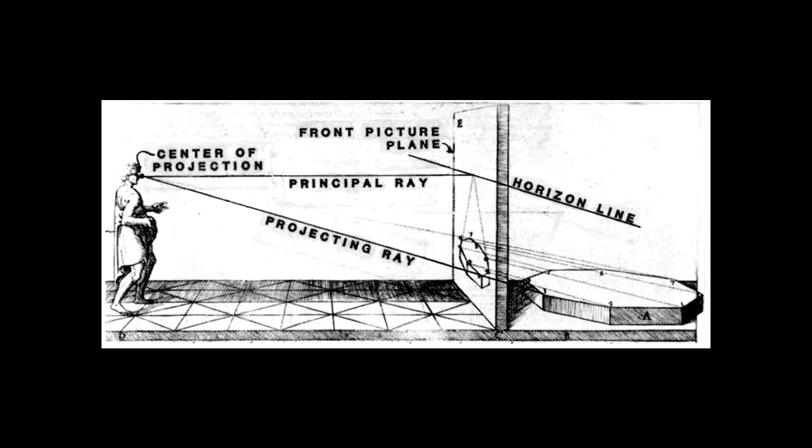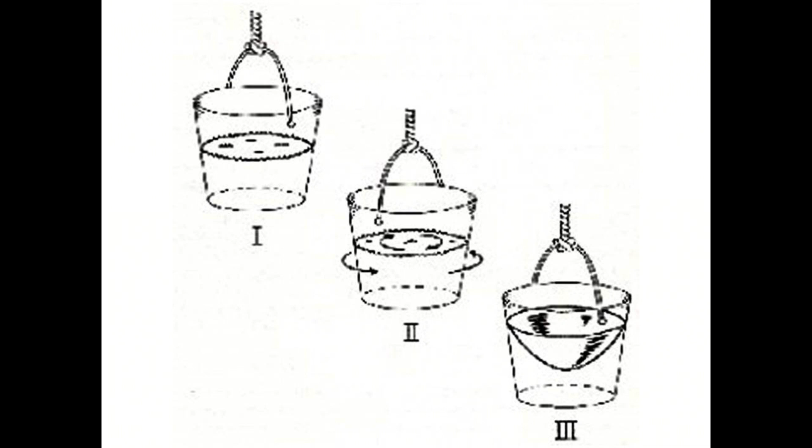But is this a representation of moving space? Where, as a result of rotation, the molecules of water are displaced and held in a different spatial configuration as a result of movement. The diagram does exemplify a mathematical space that responds to thickness, dimension, form, and is reactive. So time has obviously entered into the equation here.

Time can be written or represented in different forms — a clock, a calendar, tidal charts. There are many different ways to show a tidal chart, a flow diagram. But considering space as well as time complicates things.

Another space-time drawing — this image was used by Siegfried Giedion in Mechanization Takes Command, you may recognize it — records the point of the rapier, the fencer, illustrating a spatial, temporal, and intensity relationship. The line weight here — because we architects think about line weight, I think about line weight — indicates both intensity and depth. When it's moving forward, you get this stronger thickness of line. So you have the z-axis here now.

Another space-time drawing traces the more extensive movements here, of kind of torturing this pigeon, this bird in flight. Marey harnessed a pigeon to record its trajectory and its path.

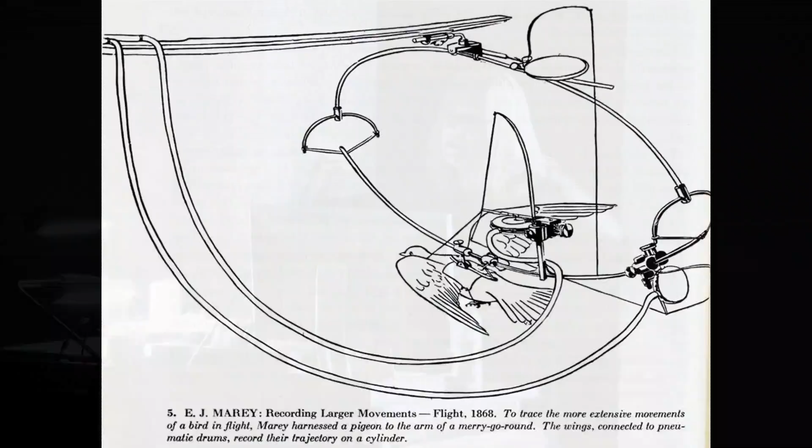Ideas or thought experiments, such as this concept of moving space, can take many forms or be played out in a variety of mediums — drawing, as we've seen examples of here, film, performance, or architecture. I always like to think that ideas don't just sit on a shelf; you take them, you do something with them, and they could be grabbed by a variety of mediums. My medium is architecture, so here we go.

This plan, similar to the pigeon or the rapier, is a drawing that attempts to describe the transformation of this wall as a response to urban life, both sleeping, eating, watching media in a small, very small New York City apartment where life moves through space and time.

So this was a very early project we did. It's actually hand-drawn, that's why it's so funky-looking drawing here. But this bar, this diagonal, was meant to hold everything that you would need.

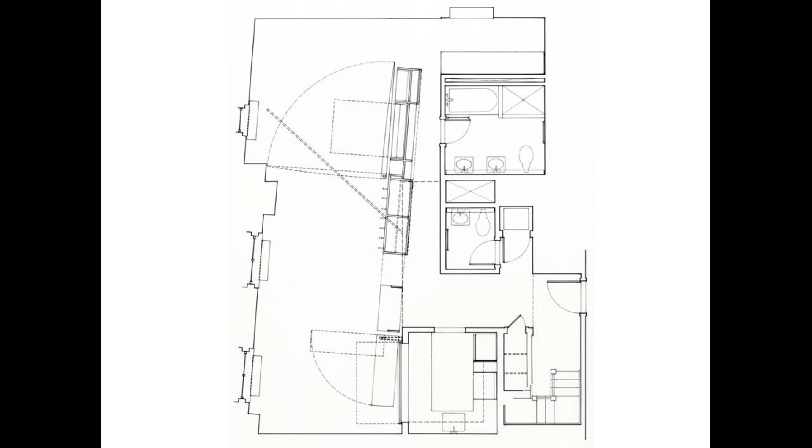You just need to come in with your suitcase, and there were kind of pegs for hanging things. This television, which is not even a flat screen at that time, would move through the space. The table would rotate, the bed would flap down, there were partitions that would move. But it was trying to do as much as it possibly could to be a kind of transformational object, accommodating life for one person in this very, very tiny, small New York City apartment.

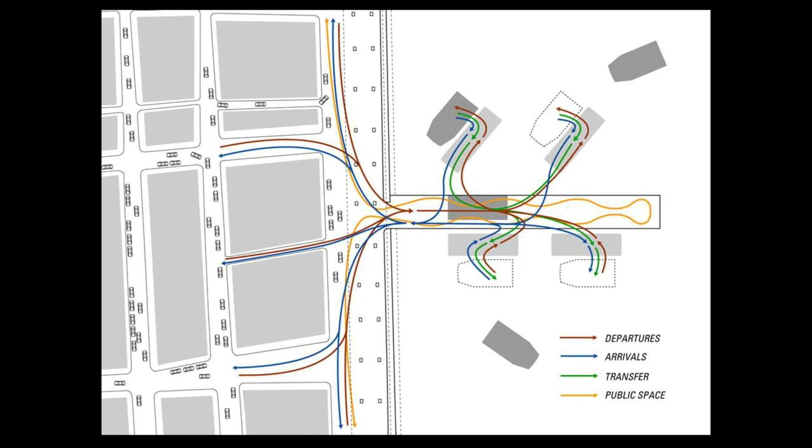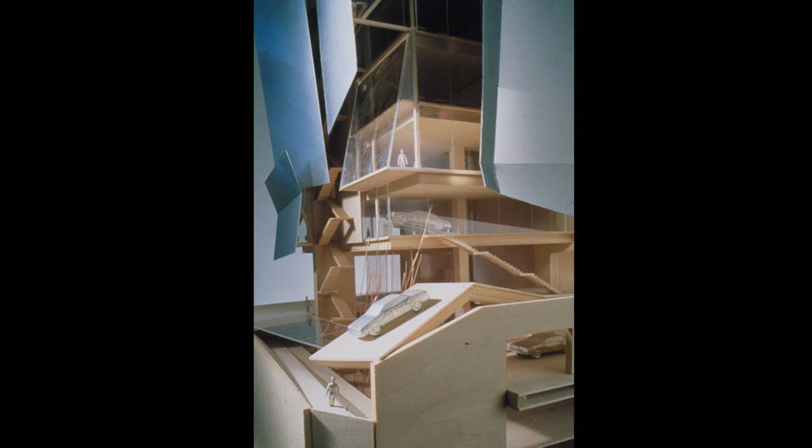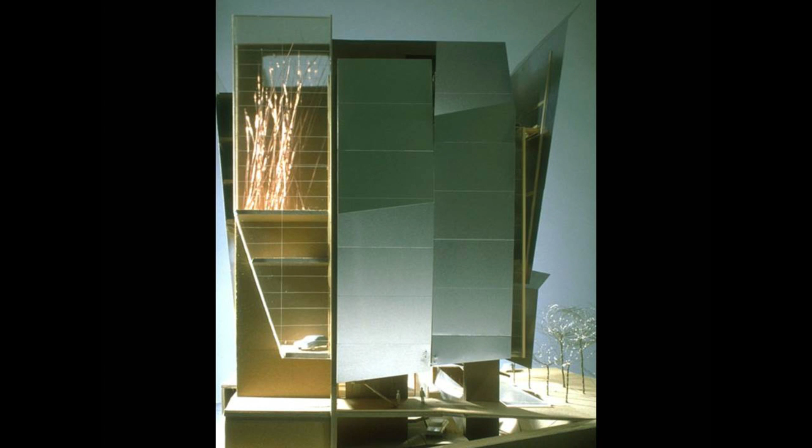Then restaurants, and a gym on top, but this is a vertical garden in the southwest corner. The reason it's closed, why you don't see windows, is that we were making spaces between this skin, which we perforated in places to create a sense of privacy, because there are incredibly tall glass buildings around this one.

And in Korea—somebody can correct me if I'm wrong—but I'm pretty sure a lot of business takes place in restaurants, with a lot of transactions, so there's a kind of privacy needed for long meetings and things. That's what this was all about, these three different restaurants going on in here.

These are a series of study models looking at how this skin attaches itself, and the whole project is actually hung from a core. There's one core, so there are really no columns—it's column-free—hung from the elevator core, service elevator, passenger elevator, with the slabs cantilevering out from that, so we could get that free space around, and then having the skin.

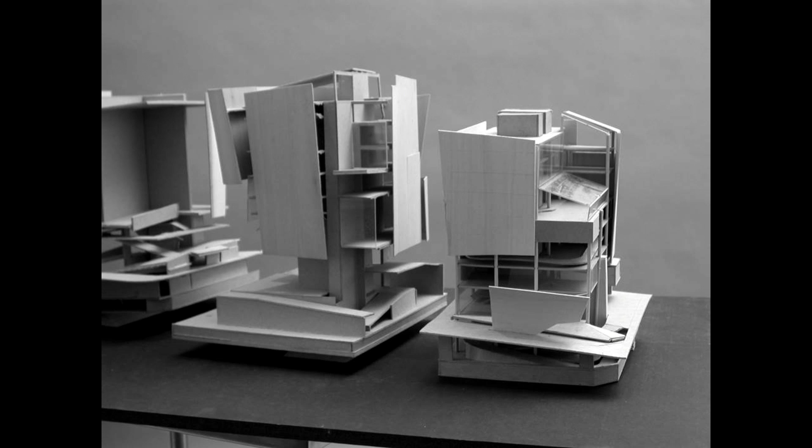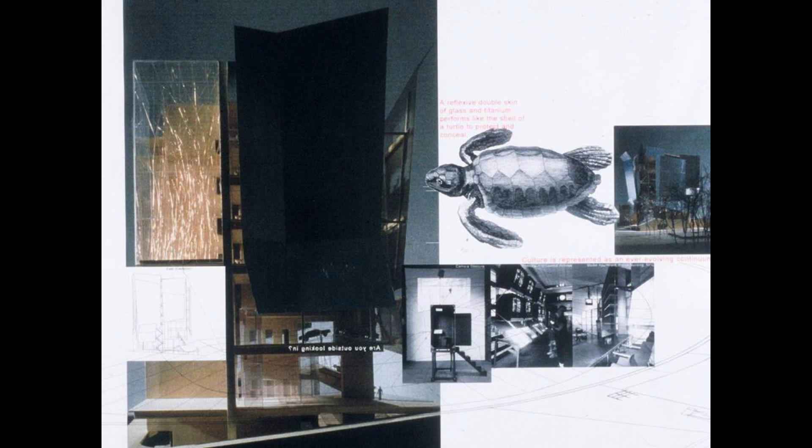Just a collage view of it. This is where you get this sense of scale—there's this company called Pasco, a glass fabrication consortium next door, and you can see it's kind of a peanut shape in this neighborhood. We called the building the Turtle Ship, because these skins are really more like a turtle shell that hides something on the inside.

So if you think back to that first drawing of the rapier and this kind of movement—this drawing is a bird's eye view looking down, and the line weight isn't good here, I'd say, to critique our own drawing that's been transferred to a slide. But there should be a difference between the thicknesses of material, right? I think there should be.

But I like to think of the building this way, that it's kind of making itself, or unwinding itself and winding itself back. That was the way we were thinking of it, as space moving in and moving out, occurring both in section and in plan.

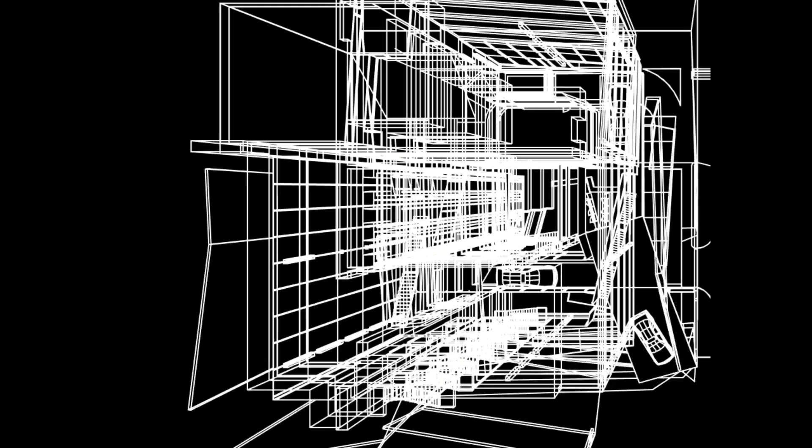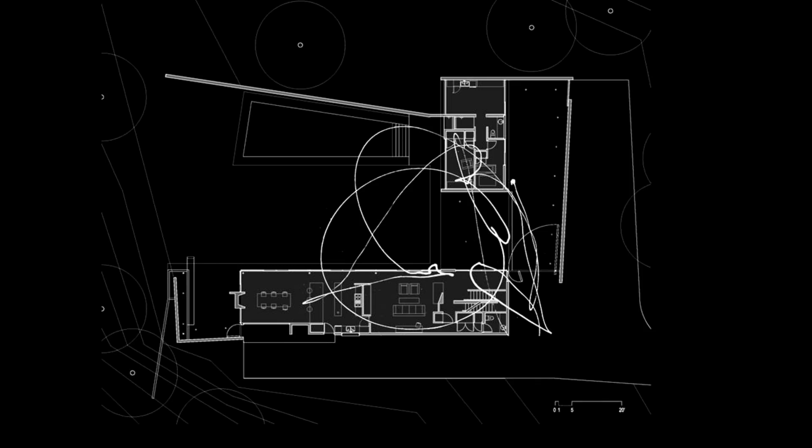So now a residential project—this is that drawing I'm trying to make the point with, by superimposing this, that the majority of the space here is void. You know, this is a house, but they're just kind of edge pieces, and the majority of it is nothing, open. It was a kind of funny commission, a development out in East Hampton, and there was actually no client—we just kind of thought of ourselves, ha ha.

We didn't get to live there though, unfortunately. But so we wanted to, and there's no view at this house. There's really no view. It's almost like an urban, like that Schiller building, kind of looking in on itself. So they're on 1 acre sites, but it looks in. But it's a very lovely climate, and people go out there from the weekends, obviously from the city.

So that entry piece, that entry space, which is here, we thought of as trying to be bigger than it needs to be, right? This kind of huge space that's incredibly generous, that sets up then that outdoor space, which is also indoor. But you actually slip in over here to go through the front door. So that's that opening. You kind of slip in here and go upstairs, living, bar.

This is kind of bedrooms, guest, living. And then the exterior has that sense of those shells, like the Schiller building. We were working on these two projects at the same time, so I wanted to show these together. But it's about slipping into spaces and using materials to create this ambiguity between inside and outside.

So here you really are outside, that's a gate, and then you go inside. This is a kind of outdoor cooking area and kitchen and fireplace, but further back from that condition. And the bathroom, so indoor shower, outdoor shower, shower looking at mirror, looking outside, looking back at what's behind you.

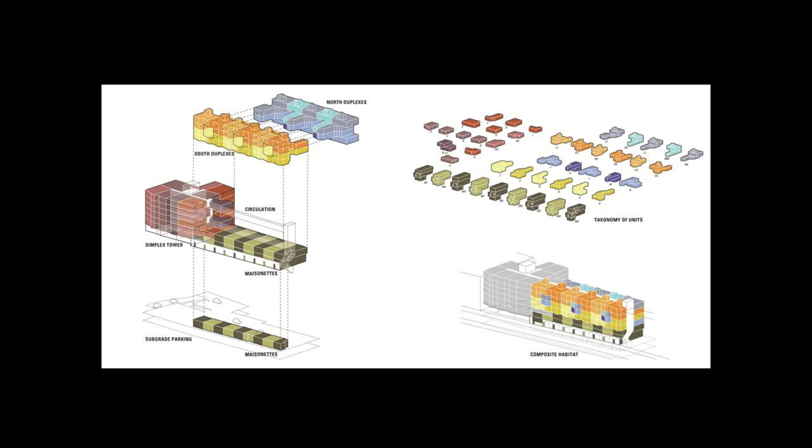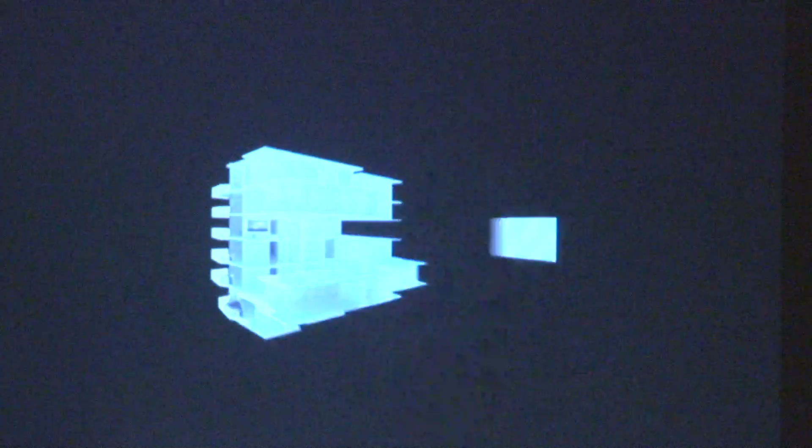This is an animation that was made by D-Box of our project. So the developer made this to show what these different unit types look like. So you have maisonettes on the bottom, you have duplexes. I think this is very funny. So, but it just kind of shows the 4 different types of them, actually. There's kind of small little 1-bedrooms, and that's one that's right on the street. That's a 1-bedroom. But what I really want to talk about here is, so this is the street, right?

And these are showing the different units. And the corridor, there are just 2 corridors here. And so that it goes over, that we're kind of doing that Corb trick of unité of going over and stealing space from the other side. And the maisonettes, there are 9 maisonettes where you can actually drive in. In New York, nobody ever has a car, but in this place there is a garage where you can drive in and come into your space and walk up, and there's a little courtyard in front.

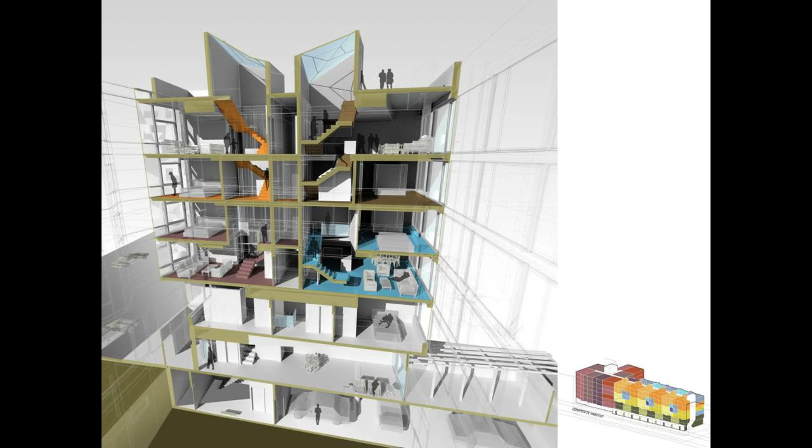One of the things we argued for very hard in this project were these windows. You may wonder why, but windows are a big thing in a project like this. How they're made, how they're detailed, how they perform. And we wanted to use this window that was a projecting window, and it actually gives you more air circulation, because when you add up all of this air that can come in, it's greater than a tilt turn or a hopper. And we wanted to have this expression on the facade of when people are in, this expression of the facade moving in and out.

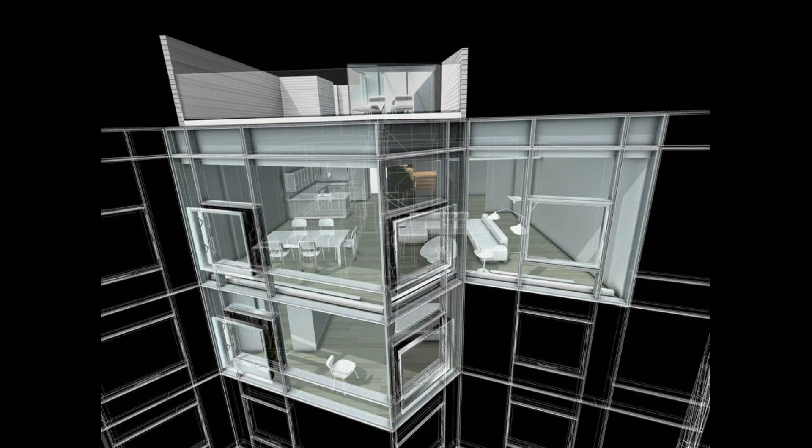So we won our battle of getting the window. They actually ordered them just before the whole economy crashed. So we were sailing at this point, into the end run of it.

But here's one of the installations. Here's the project with just a few of the windows open - these are the maisonettes, and then it steps back, and there's a kind of tower piece here. And then this is what we were calling the bay window that puts you out into the street, gives you kind of steals, is very greedy about getting more space, and looks on a slight diagonal down the street.

Now, another thing in these units - these all seem like very tiny things, but when you're building, how do you make that tiny space feel bigger than it is? Remember the house that was trying to be greedy about the view?

We recessed the trim, the mullion on the window, so that we get glass as high as possible into the edges - down here and up here, so you don't see the frame. It seems minor, but to us it was important.

And we used angle glass down here, which is a frit in the glass that allows you, while looking down, to see down - it depends what angle you're on - but people can't see up. The Japanese actually developed it for housing units that were very close to each other, where you wanted to look this way but not across. So the frit controls that. You may be familiar with that.

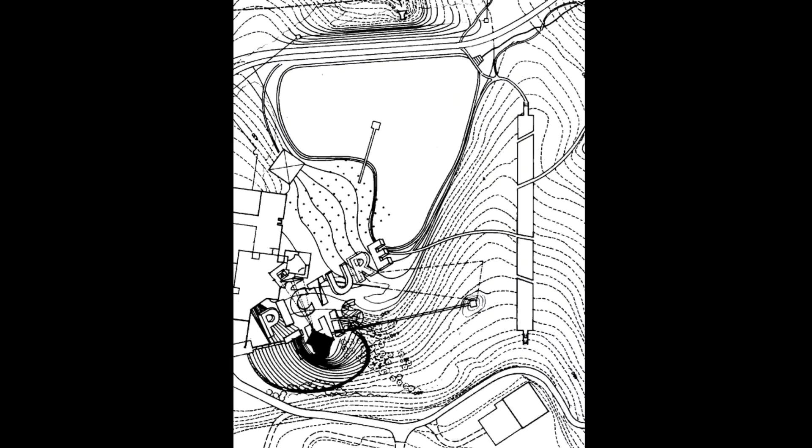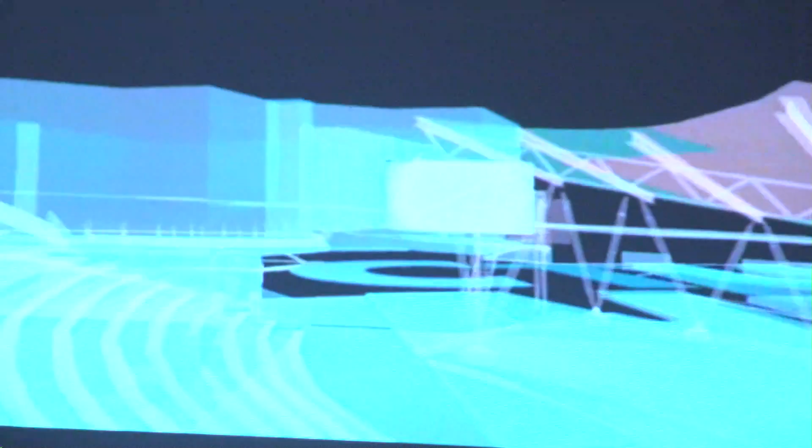This is the first animation we made in our studio, a really old one. We wanted to show them that during the fly-through tours, you wouldn't see the letters all the time, but you'd get a sense of the spaces - the amphitheater, the cinema. They could operate separately or together, and from certain vantage points you'd see the letters.

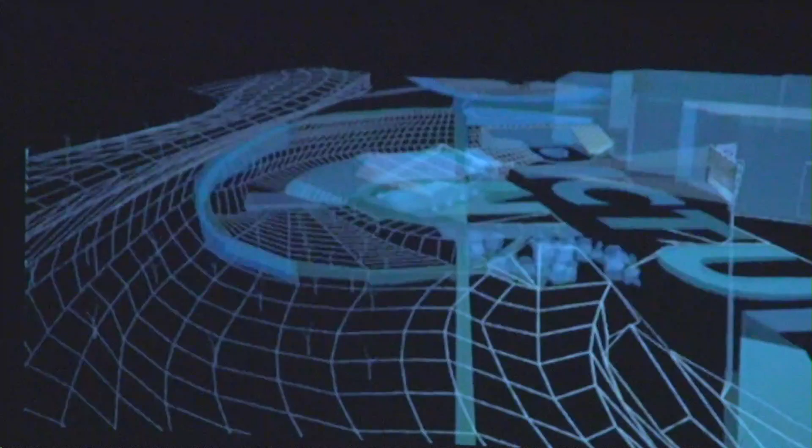We rendered the project in transparency, so you're rendering both sides of something, and it was incredibly heavy - this file, believe it or not. I could probably do it on my phone now, but we had to take the whole CPU, the hard drive, out of our office in a taxi somewhere so they could put it on a tape. It was completely nutty.

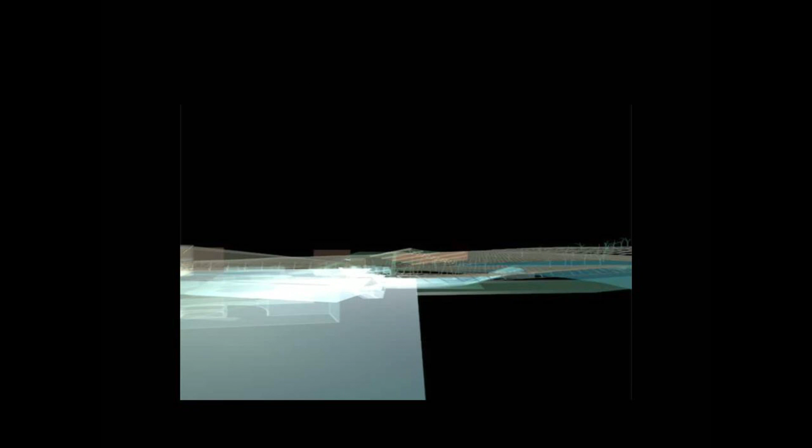But it was very important to be able to explain and understand the project for ourselves that way, and we made construction drawings of this.

These are the construction drawings, which I think are amusing. This is the sheet that had the full picture, and then there were sheets with just certain letters - there would be a sheet with just the 'PI' on it. The letters have other text within them.

Barbara used texts from historical references, from writers and other references in the state, and they're made of different materials - some are sand, some asphalt, some block-like walls. Some of the H goes up onto the amphitheater roof.

The grass isn't growing in yet. This is the sand - the letter C is sand, so you can sit on a beach of sand while watching a film at night, and the projection booth looks this way. 'To be rather than to seem' is the state motto for North Carolina, believe it or not.

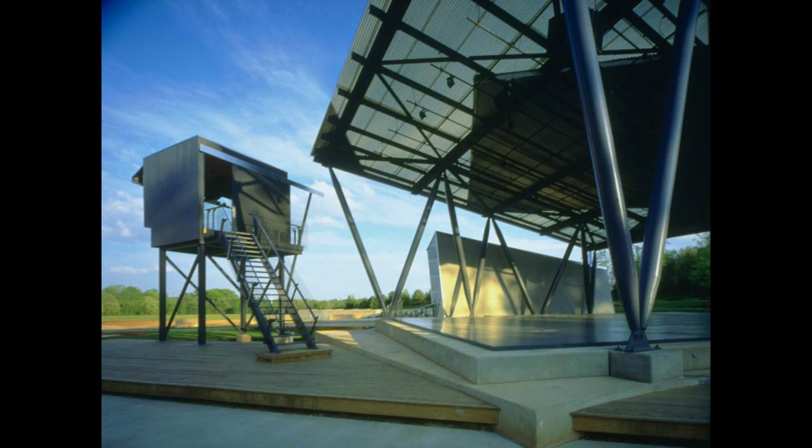These elements sit there waiting to be engaged with and used in different kinds of performances, whether it's a bluegrass festival or a film happening here. You can seat like 3,000 people if there's a film going on.

Here's a projection with the film - that's the wall. 'Please read the writing on the wall.' 'Please don't do it to others.' 'Please, please me.' 'Please don't turn me inside out.' So a whole number of words that started with the word please. And the opening.

So, this is in Coney Island. This is a project for the Coney Island Aquarium. It's a perimeter treatment for the Coney Island Aquarium, and it sits on the boardwalk on the Coney Island beach.

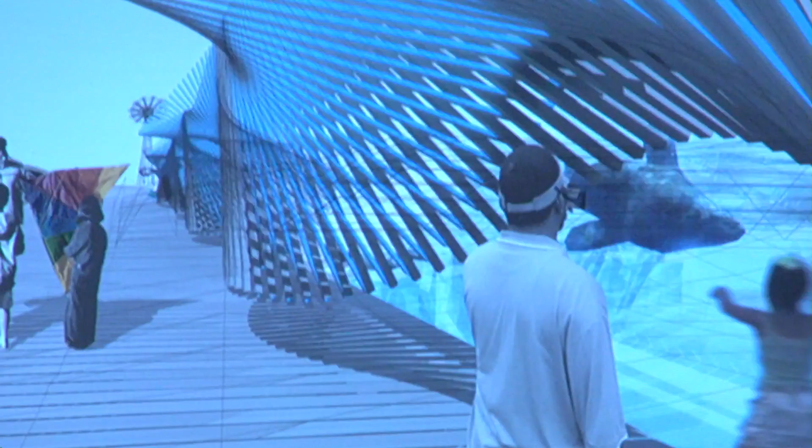This is a big whale balloon that we added. So this is the boardwalk, and we wanted, so it's a very funny commission, which is to create a perimeter element that gives an identity to the aquarium, but also gives it a kind of security, while letting you know it's there, and setting up your experience for going into the aquarium. This is a very unfortunate relationship right now. They just kind of sit next to each other.

So we created this thing called the wave fence. We wanted to do something very simple, very inexpensive, with just wood. These are just pieces of wood, very simple. And they're painted with a photoluminescent paint.

Okay, so all of the lighting on this is free. Nothing's plugged in. It's not LED, it's not emitting. It takes light from the sun during the day - we're at the beach, we have great exposure - and then it emits it at night. And it changes its shape to lift up and show you.

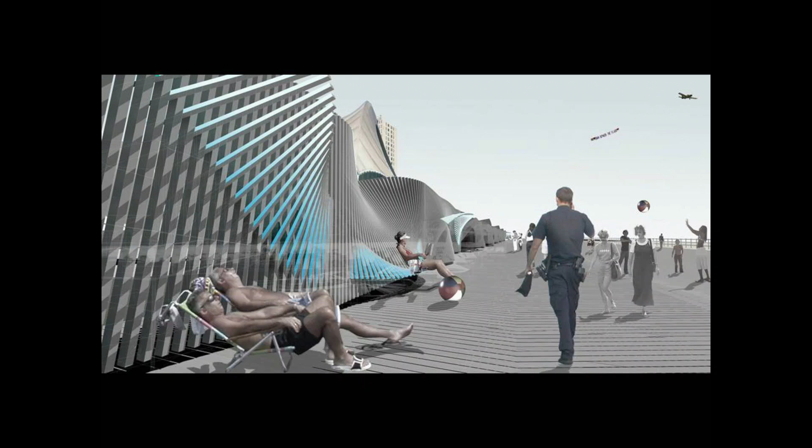This is a festival that goes on at Coney Island once a year, but it can show you, through periscopes and different things, or it could be a seating arrangement, a seating device, or a shading device - different interactions, let's say, with the aquarium.

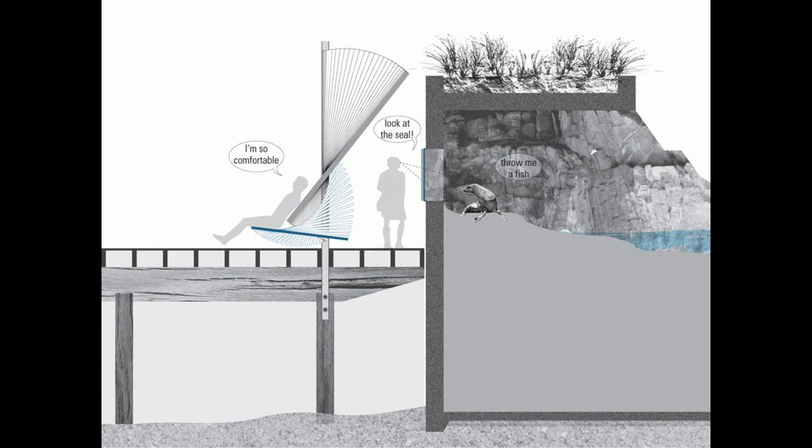This is the real section of the aquarium. This is the seal tank, and so we said, well, what if we open it up? This is the boardwalk as it is, that space under the boardwalk. Other ways in which, when this very simple device moves, it might expose and create sections where you could go down and be closer to something, or look from above.

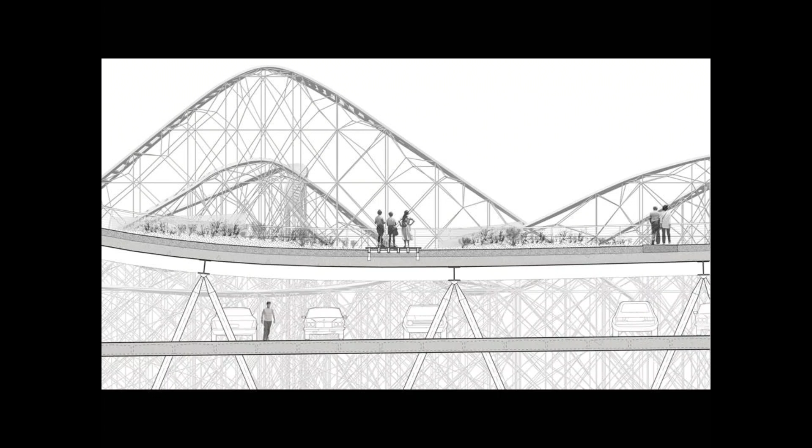And then there's the Cyclone Racer, the very famous one - here it is, right? Incredible ride there at Coney Island. And we were creating a parking structure in front of it with dunes above it. So you're seeing these two in juxtaposition to each other. Here it is: the wave fence, the dunes, the parking, the cyclone.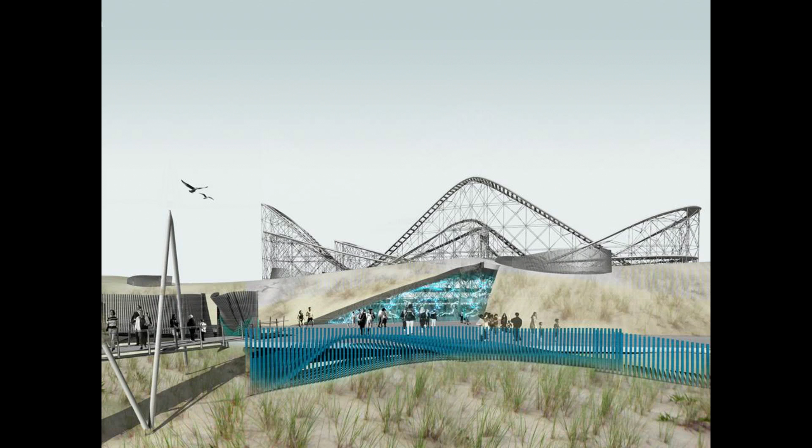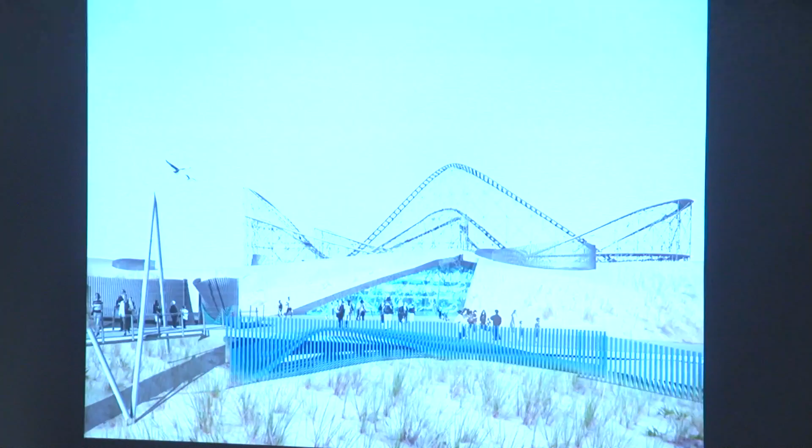And we worked with Linnea Tillett, a lighting designer, who brought this material to our attention. So we were very excited about it with this simple device - we could create this reflectivity. So, another kind of rude juxtaposition.

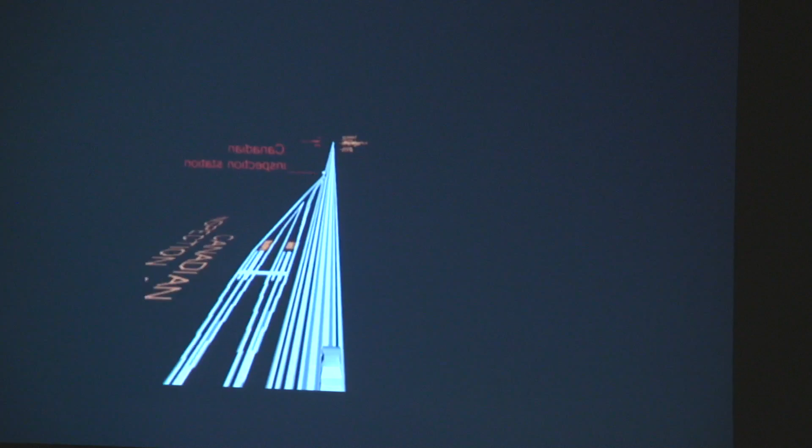So we did 2 projects for the federal government - they were ports of entry. The federal government, GSA, General Services Administration, has this design excellence program where they hire design excellence. I don't know - I guess they hire architects to make them go crazy a little bit.

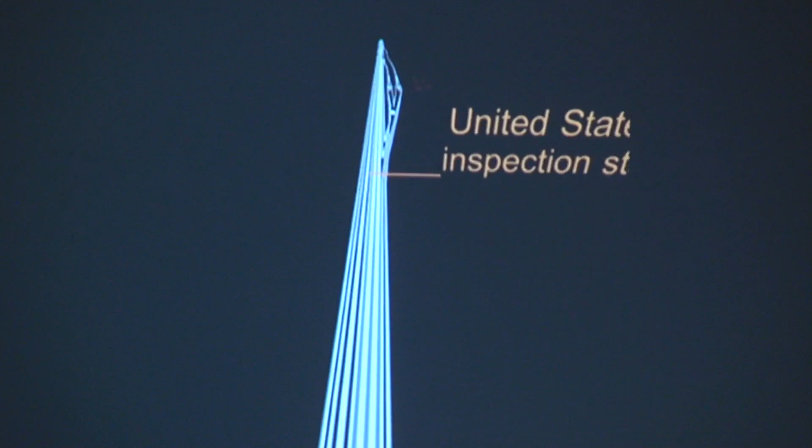But this is a drawing, an animation of the way we saw this idea of crossing the border. It's not the border itself, it's actually a line perpendicular to it, which you move along. Can I do this again? Is that okay? Because we were talking. So, of course, you leave Canada, and then our port is in the US, but you always greet it from - that's where all the action is - moving from Canada to the US.

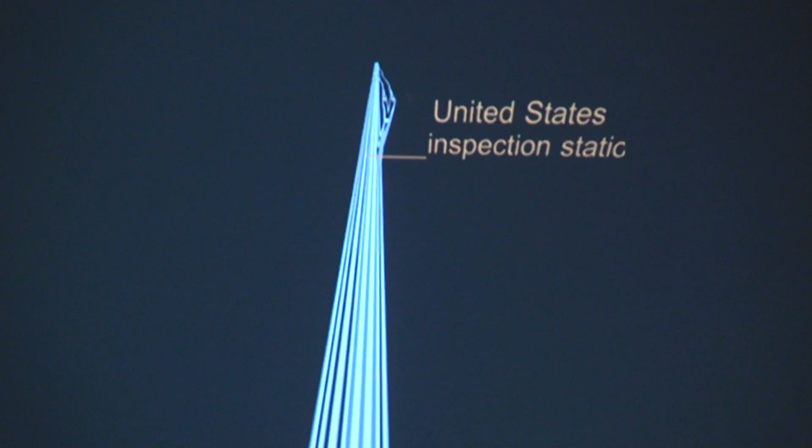So these are the things that you have to come in contact with, right? Your speed changes - these are all events that occur. You may not know it, then you cross the line. And the line, then there's the inspection station. There's, you know, 1, 2, 3, 4 buildings there, kind of a lot of asphalt, a lot of land. But it's a line that basically thickens as you move with your car.

You most likely don't get out of your car. Hopefully you don't get out of your car. If you get out of your car, you're in trouble. So you don't want to be getting out of your car. I naively thought, oh, it's like a visitor station - you know, we'd done Corning, oh, people are going to go and see our building. You really do not want to get out of your car. You should not be getting out of your car.

So this is what the working drawing looks like. This is a real project, a crazy, crazy project. So this is kind of the key drawing. There are a number of buildings here.

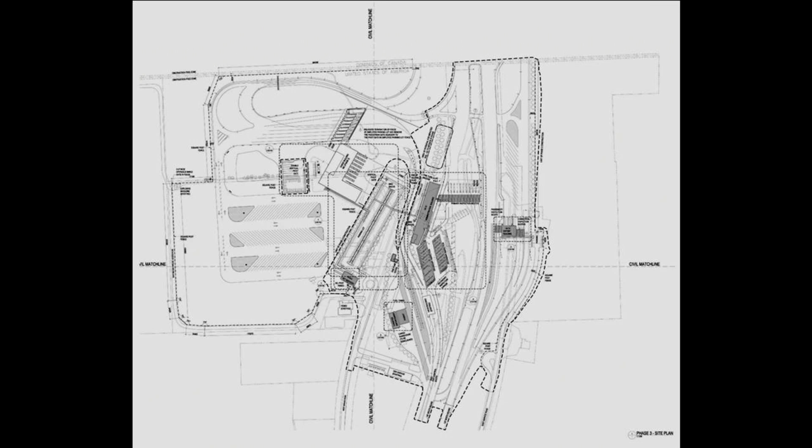You're organizing a lot of stuff, and there are a lot of canopies. So these, we were doing, somehow we got two of these at one time. It was kind of crazy.

So this is at Massena. Sometimes when you listen to the weather and you're in New York and they say it's 30 below in Massena, this is it. This is like one of the coldest places on the northern US border. You're kind of coming from Montreal, and then this is a reservation. And then there's an Alcoa plant and a GM plant, so people come across and work here. A lot of the Native Americans actually living here, but there's a lot of trade going back and forth, and a lot of trade here at Champlain, which is a little further east.

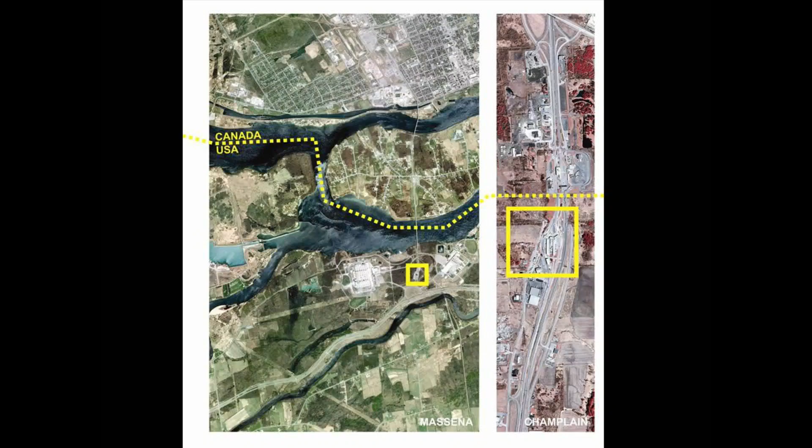So the first thing, remember I talked about Corning, one of the things we realized, because you're moving towards this building, is that when you're going from Canada to the US, the building is always in shadow. It faces north, it's never going to have sunlight. Look at this, this is the existing building at Champlain, we didn't do this. So it's forever in shadow, kind of a nightmare, and it's really gloomy up there a lot of the year.

So in both of the sites, we really wanted to figure out how we could get as much natural light as possible. Can we get light onto this north facade, and can we get as much light as possible into these buildings? By the way, these are essentially like police stations, and the officers in here would be very happy to just be sitting in a concrete bunker.

So that's kind of what you're working with. But the architects are the eternal optimists, right? We wanted to bring light in. They're spending a lot of hours of the day in here, and the quality of life is terrible. So we had this idea at Champlain, on the north facade.

We thought, what if we made a skylight that faced south? Just imagine that that light could come through that skin, and you'd get daylight emitting, and then it would also come down into the space, into the offices and into the waiting area, where there are people working.

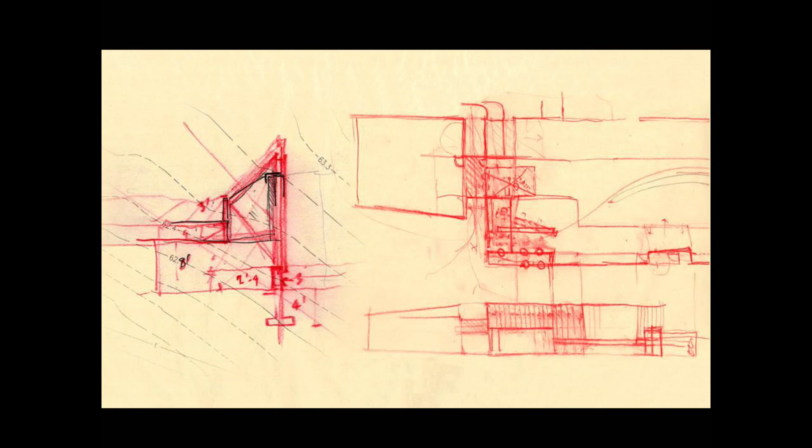So this is that condition. This is the working drawing of that condition, showing them how high it is. This is ballistic glass, because anywhere you have clear glass, you have to have ballistic glass. This is channel glass, and then this is that skylight that brings light onto that facade, which is now channel glass.

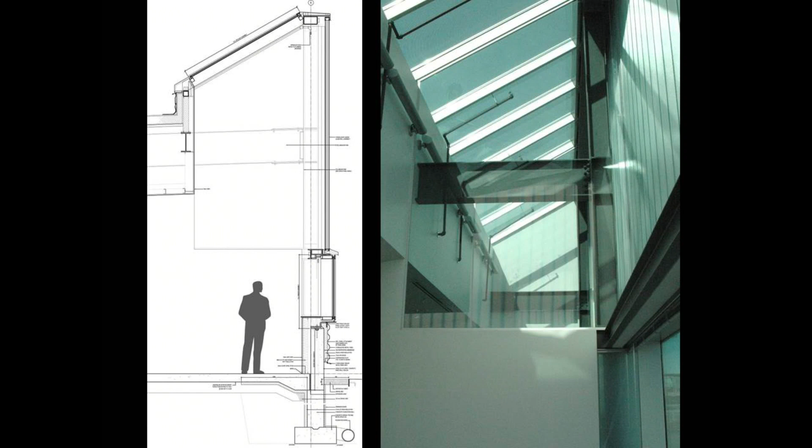The lobby of that space. So here, this is the effect of that. This is the north facade, and this is the effect of bringing light out through that channel glass onto the north. So they let us build it.

And there's so much land, just so much field of asphalt here. We worked really hard in this project, and in the Massena one I'll show, to not have buildings sitting on curbs and sidewalks. There's a tremendous amount of snow up here too, you need to be able to manage it, but we also want to manage the relationship between the building, the landscape, and the ground.

This is a forensics lab that's looking out onto the booths, where the officers are kind of checking people as they're coming in.

This is an office, and it has blinders, but the blinders are light, so you steal light. This is a glass clerestory that's sharing, so I can steal more of that facade from my neighbor, and they let us build it.

I always say you're kind of doing something over here, and then you're doing this over here, and they don't quite know. That's what my office looked like. This is a secondary port. I think this is really the reality of the situation.

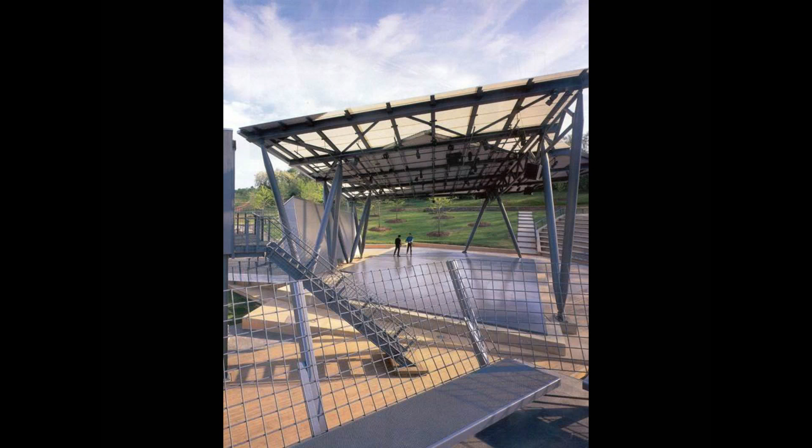But it's kind of fun because you have to solve this problem. So we developed these pieces. This is showing you the canopy at North Carolina. The supports are these steel angled pieces, we call them kind of like walking man, so that they have this appearance of movement, like the canopy or something is moving through them.

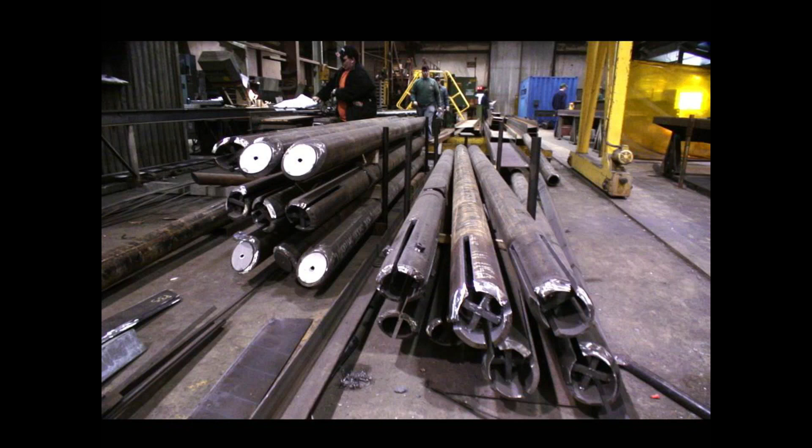So that's why we were tilting them, to kind of express that. These are the pieces that get held together because they're tapered. And the canopy has huge concrete barriers here so that somebody doesn't knock the whole thing over if some giant truck comes through. This is folded, it's actually a welded plate.

We'd made an earlier canopy for LaGuardia Airport years ago that was made of carbon fiber, super thin, made by boat builders, and glass. It was assembled in about 4 days—this whole thing, 66 panels, were put together in 4 days.

So we thought about how we could prefabricate this piece up in Champlain to come in very large segments. This is the continental canopy. This is a hand drawing, you notice.

And so this is the shell piece. It's a Nomex shell with carbon fiber laid over it and then sprayed white so it works as a light fixture. But then the glass piece, which is a triangle here—that glass is working in compression and tension in this case.

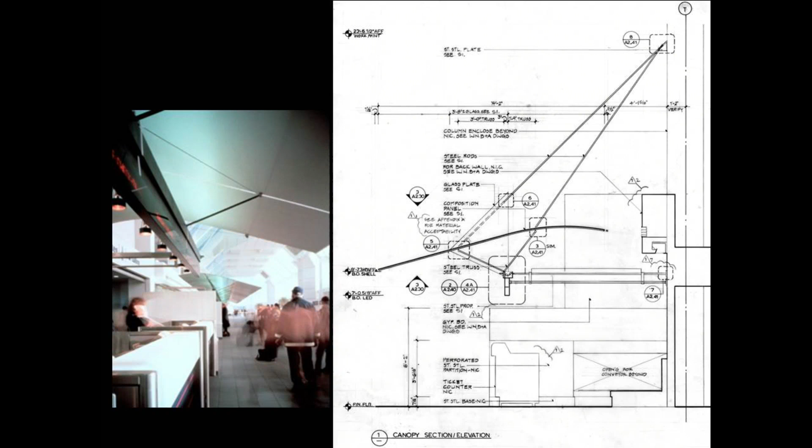But here at Champlain, we're developing this folded section so that we can get strength out of it. This is one of the sheets that shows these different kind of configurations, and this is actually for the work points for the steel fabricator.

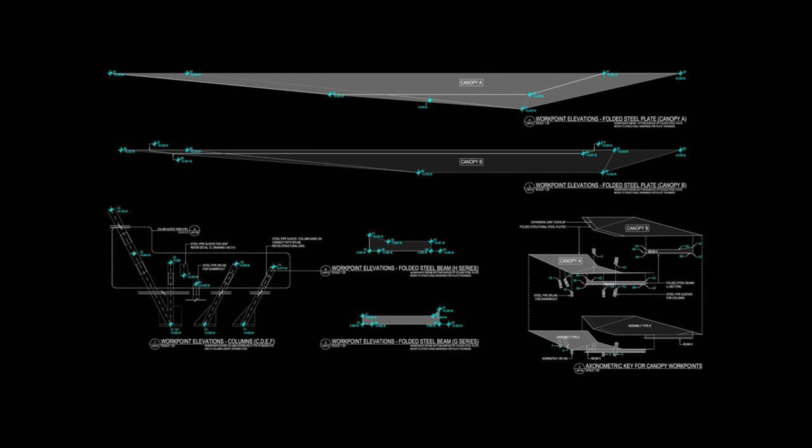We were doing skin studies with the fluid dynamics, working with Arup. We want to get a certain amount of depth in that folded section, but we can't have too much so that it fails. So obviously this is the one that is working, the geometry that worked.

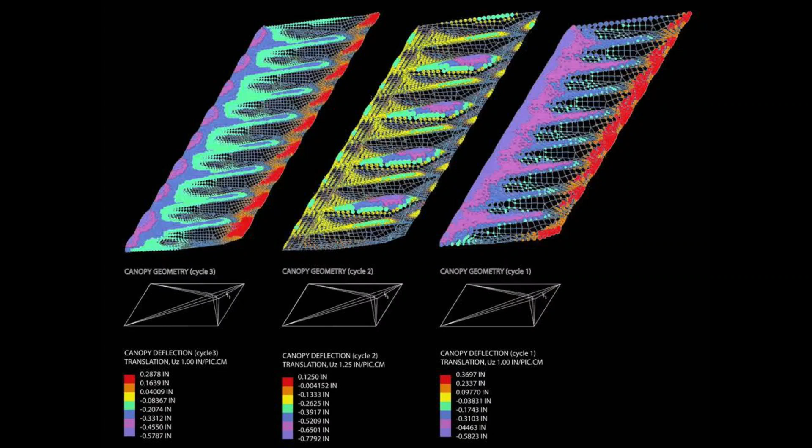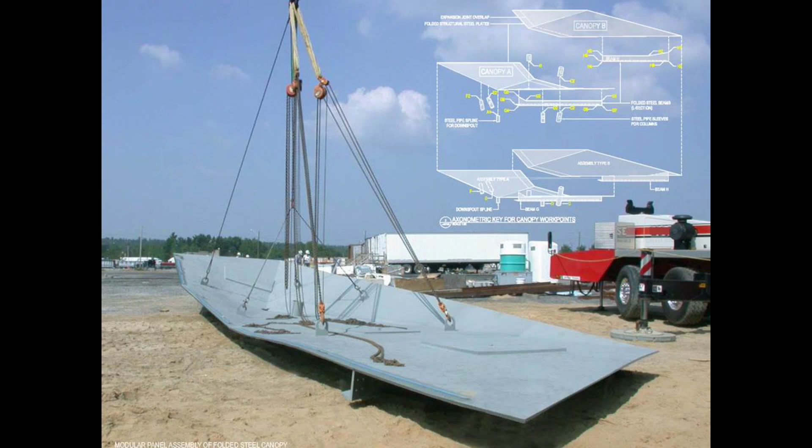They were not bent, they were welded. And this is the size of them, something that can fit on a flatbed, and then they're just hoisted up into place and also welded together on site.

So at Massena, that other location, the coldest location, another port of entry, there was a different kind of canopy where we wanted to make something as thin as possible at the edge. Could we make this leading edge as thin as paper, to trick you into thinking this thing is just so light, that you're moving under it, and that it's also like this giant light fixture, and that we could uplight it and have it be a continuous surface rather than that folded plate, which was at Champlain.

So the lighting sits in the asphalt here and shines up. The whole thing is kind of bondoed on site. And this is that canopy.

It's really wild. This is called secondary, and you never, ever want to go to secondary, because this is where they take your car completely apart and leave it in this garage or something. So you never want to go to secondary. Primary is over here, where you just whiz through, and then this is secondary. That's trouble, big trouble. But we got to make this very huge canopy.

We wanted to make it obviously separate—there could be no windows in this building, believe me. But the canopy kind of sits there in front. Here's a section through it, showing how we were achieving that. So there's this gutter, right, to deal with the water. And then it gains depth right in the center. And this is the plan of that.

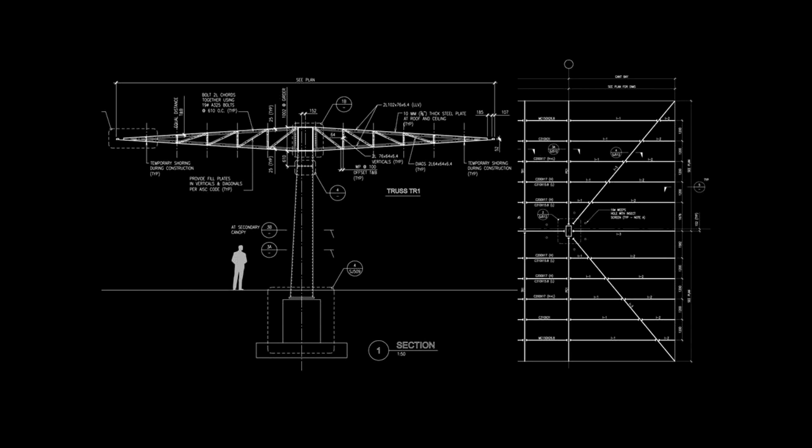Here they are on one of those days. That steel has got to feel really terrible cold, but putting it together, and that's the canopy next to the facade.

So this is now Massena. It's a different building. We used polycarbonate here on the facade. And another, I say we got to have two ideas.

The second idea had to do with this system of the yellow through the site. And the yellow was, again, we did not want to have a curb. This all seems kind of crazy, maybe, like why is this an idea for a piece of architecture? But we wanted to have these spaces that people walked on, that they moved on, that was safe, because this is all about vehicles. Remember, you don't want to be out of the car. So the officers or anybody who's walking out here really needs to know where they need to be. So we convinced them to just have the yellow, and that there wouldn't be a snow removal problem, because you could just go in here and you don't have the curb and everything. And then there's yellow. The yellow is kind of a signal to where people could be.

This is a detail of the facade where we're explaining to them that you can't be shot, basically. So you're behind a concrete wall. We can bring a lot of light into your building, but you're not going to be shot.

So this is a clerestory. This is facing north. It brings light in, and this is, I think, an office or a conference room. And then up here again, a taller ceiling. There's no way to look out, but you get a lot of natural light.

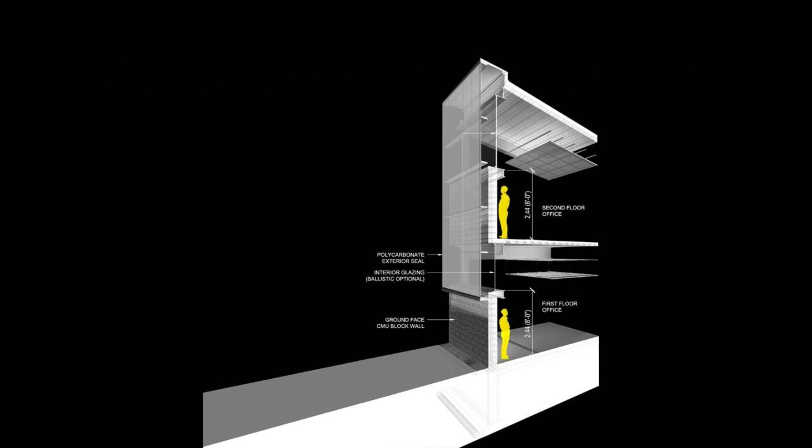Here's the construction view of that. It's a horizontal truss that this hangs off. And then we had these very large letters that go up and under. This is an interior view of that. So this is a horizontal truss that the polycarbonate is hanging on, then supported on the steel columns.

The polycarbonate was a big battle. I'm telling all my war stories, but you fight for these things. We had to prove that — I mean, they have polycarbonate, that's plastic, you know — we want concrete block, but you can shoot, as if somebody's going to do this, a 2x4 at that with a bazooka, and nothing happens to it. It's very, very strong. This is me selling the project, right? But it's true, it's true.

So here's our diagram of the yellow. It's a way that we were kind of signaling this movement of moving up and through and in, and then the pedestrians move into some of these zones. This is where customs happen. This is a scanning building. This is that dreaded secondary building.

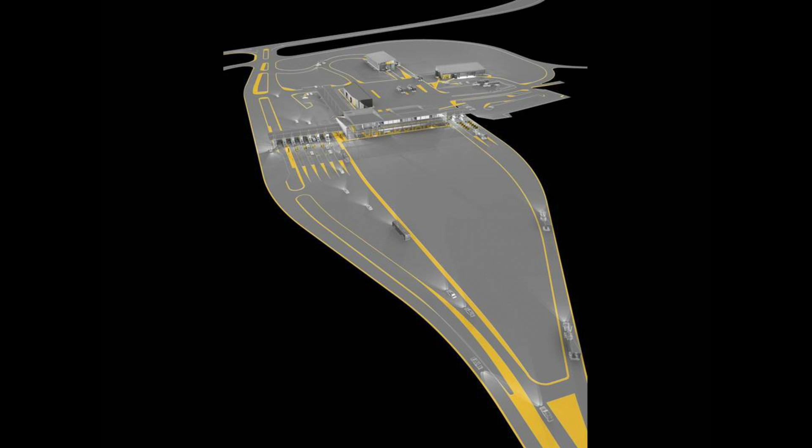So this is a diagram of all the yellow in the project. It's that yellow from the yield signs. This is everywhere it is in the building. On the back wall, inside there's a little booth. And there it is — they built it.

So that's the primary, and this is that secondary canopy. This is customs, and this is a scanning building that I'm going to show you. So you're coming from Canada. And this is the polycarbonate that has different layers of translucency and transparency, depending on what's going on behind it. This is, of course, ballistic glass. This is where the port director sits, and then these are also offices.

So this is commercial, so it's a higher bay, but again, I wanted to show you this whole field of the yellow that protects the building, protects the pedestrian, and leads you through the site. Here, you're coming out of the commercial, and this is also a loading dock, but these — like thinking of our handrails at Corning or the structure for the canopies — we were trying to create something that had a sense of movement, of direction, with these handrails adjacent to the walkways.

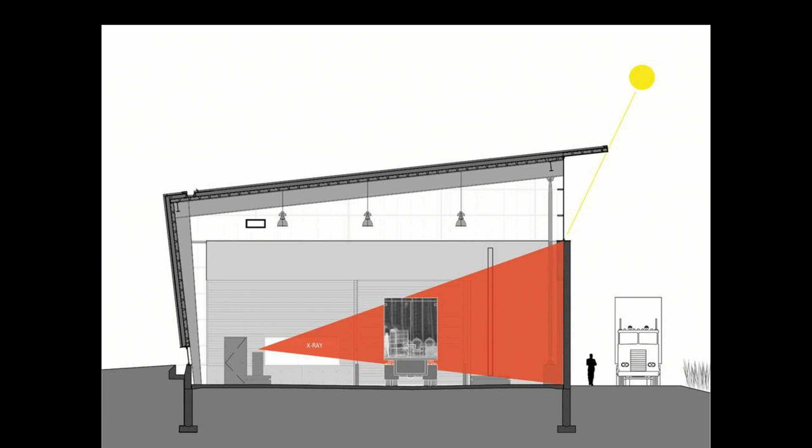The diagram of it is, this whole building is about a truck pulling into it, and a machine moves along the side of it and scans the truck. So there has to be a concrete wall here so somebody doesn't get irradiated, right? We wanted to bring natural light, and they didn't care about any natural light. We wanted daylight at a lower level too, where people are working and setting up the equipment. And then there's a tiny little room where the driver sits while the truck's being scanned. So this is the structure.

It's kind of a cantilever from this side, right? This is that concrete block wall. This is a wall, and this side is propped so that light can come in, and then there's a kind of slot along this side.

Here's the building. This is the little booth, it's yellow, this is where you go sit. There's a glass window so you can look at your truck and know it's there, feel good about that. And then there's a device that runs along here and scans. And then this is that clerestory that lets light in at a lower level. There's the big truck, the building all about one giant truck. That's all it's about. Crazy.

And that's that clerestory. And this is kind of how we imagined the building, that it was just floating, right? This is because that's the side where the cantilever comes over, but it just floats and looks like it's just propped up there. But it's really just about a truck.

Now the facade is where we wanted, since you're coming from Canada, coming from the island, coming down the bridge, we wanted to announce where you were, announce it like the Corning thing, where is the glass. There's this kind of anticipation, and even if you don't have anything wrong with you, nothing you're smuggling in, there's always this apprehension about crossing a border and talking to one of those officers. So we wanted to make it very clear where the United States was.

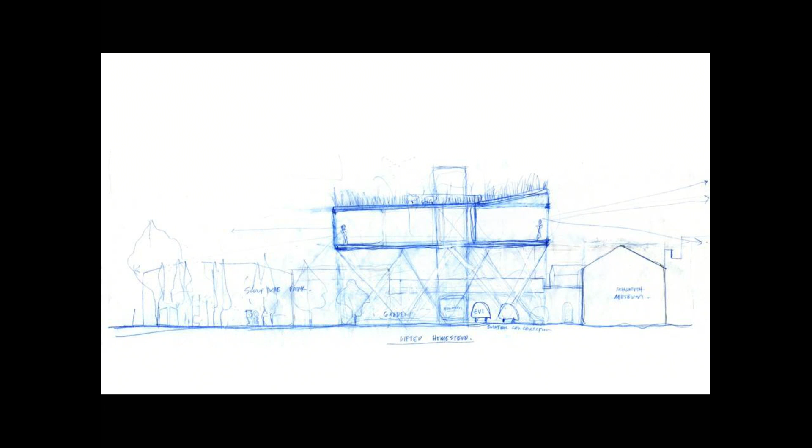It's for, if the director of the museum were to move into the town today, what would his house be? So they asked a number of architects to make a design. We made this elevated project. I wanted to show you some studies of the process.

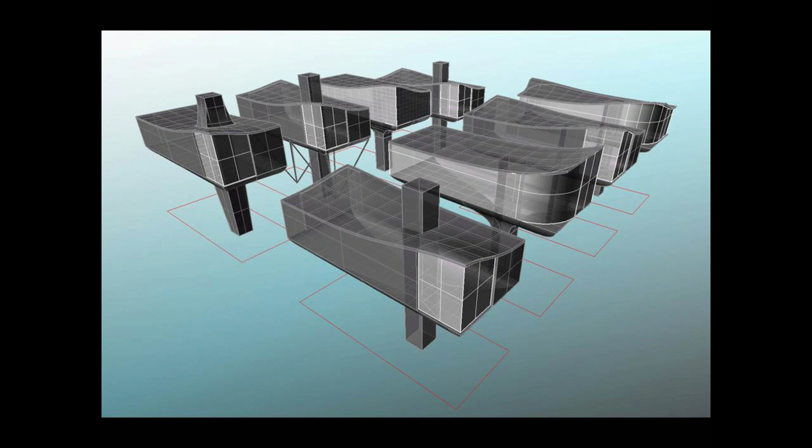This is a kind of family of forms. These are very ugly, we called these the hair dryers. We thought they were hideous, but we were trying to see how we could support this thing up and think about the structure, elevating this building, one house up in the air. We thought about how an elevator might bring them up, and thought about the roofscape on this. These are just a family of forms. Remember, there's just one house, so we're just studying these different forms, with an opening in the middle where you could have a courtyard.

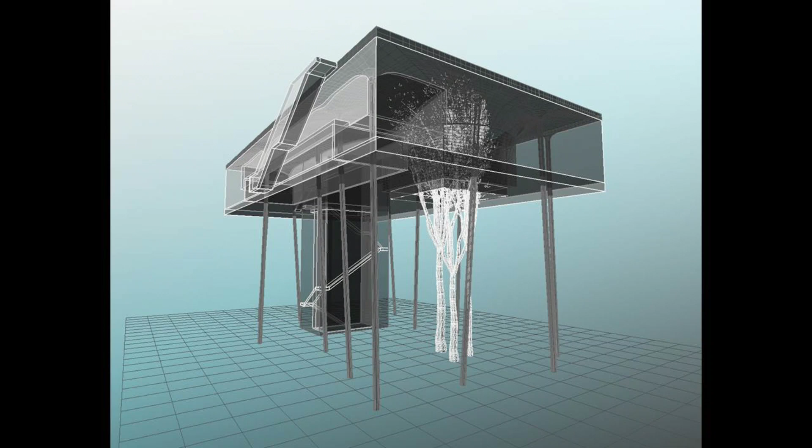This is getting closer to a final version. There's a glass elevator. This is about a family that goes away on the weekend, so they drive their car in, pack it up, go out on their boat, so they take the car right up here, load it up, and then go out with their family.

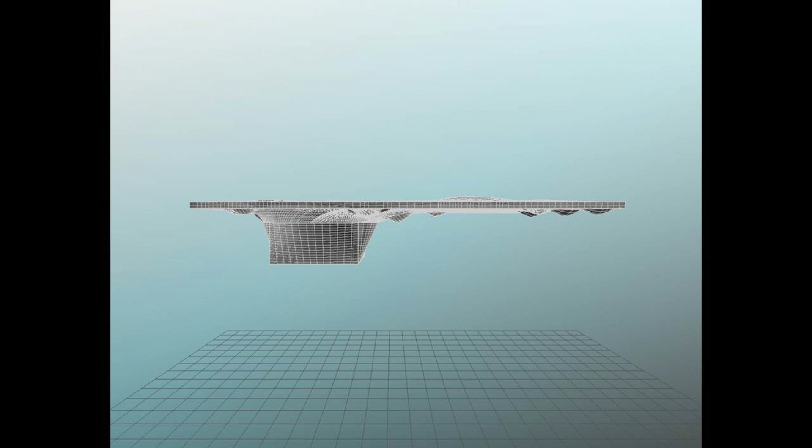And this is a study of that roof, looking at how the columns would be received here at the underside of it and how that skin would come down. This is just kind of very quick.

This is very kind of garish and ugly, and you can see where the trouble lies. The trouble lies in here. How would we bring this down, right? And this is an outdoor space there, and this is kind of sealing it.

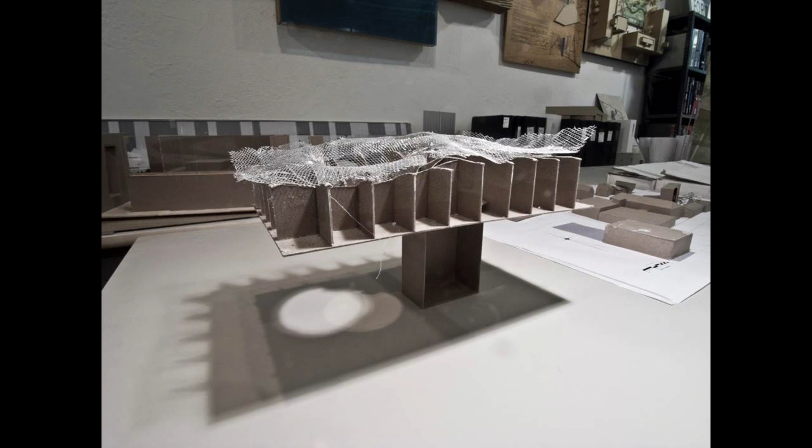Very crude models in our office trying to make this thing, and that's the final little study model we made. But just to see that space and be elevated above the ground in this little town, Rockland, off the coast of Maine, the birch trees grow quite well.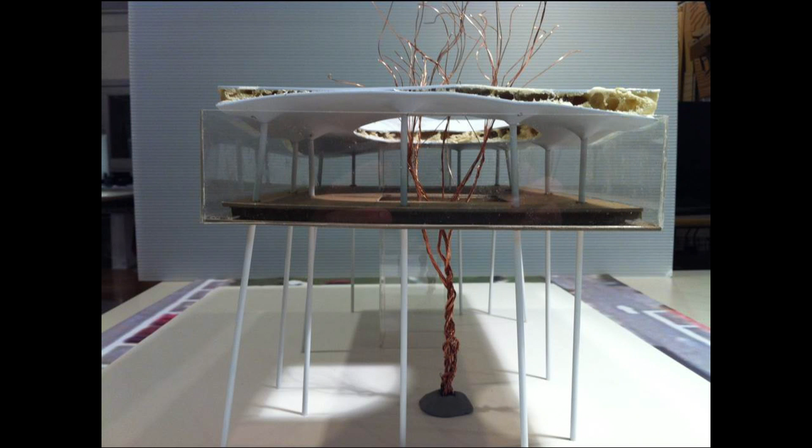EMS is an emergency medical services building. It's very much like a fire station, but emergency vehicles sit there because this community is not near a hospital. After 9/11, they commissioned a number of these buildings in neighborhoods that were a certain distance away from the hospitals, so that vehicles could get to them in emergencies.

Here's a little building. It was just finished. We had a ribbon cutting just before Christmas. And it's a small little project that has a tremendous amount of stuff moving through it. It has these vehicles moving through it. It's really a kind of a machine, actually, that lies waiting for these vehicles.

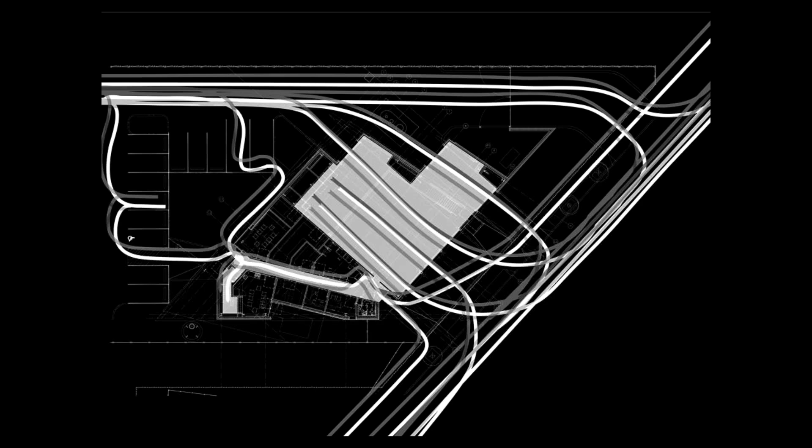And this is just the lines of all the kind of traffic paths that go through it, and where the trucks go, where they go around. And also, we were very concerned with how the air flowed through the building. This is the drive through the airflow and the sun.

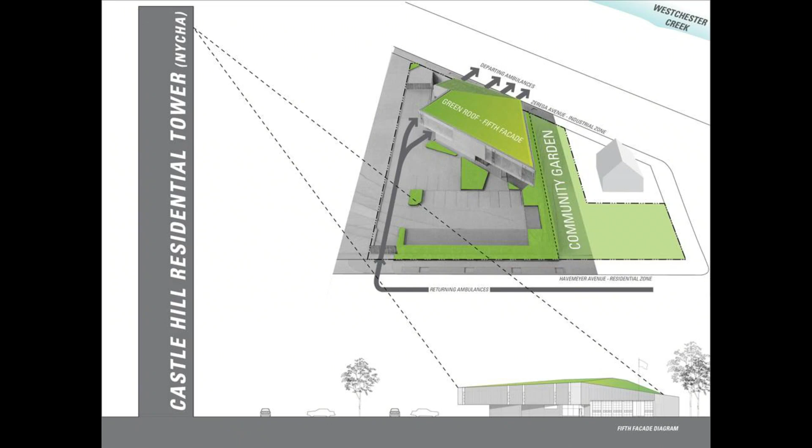So that's that cantilevered piece. This funny little guy who kind of homesteads there. He'll be there forever. So that's the building. And its fifth facade is a roof, a green roof. We got the first green roof for the fire department of the city of New York, and some photovoltaics.

Well, this piece actually moved also. The whole piece moved years later and was part of a series of installations for the Public Art Fund when the Republican National Convention came to New York. I don't know why, but they did.

And when it was reinstalled and we were asked to pick a site, the artists, the performance artists, and I picked Foley Square down in Lower Manhattan where all the courthouses were. And when we reinstalled it, we had to create handicap barriers for our freedom of expression piece. You can't see the ramp piece, but it also has barriers. But people would go up and they would scream, like, 'I hate my boss,' and things like that back at the city. But anyway, thank you.